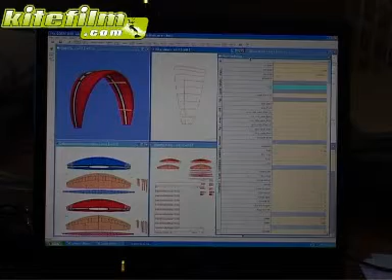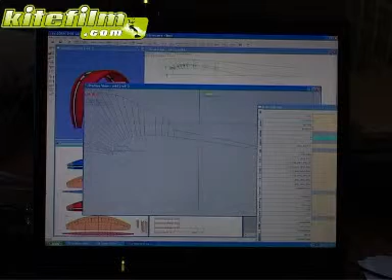From there we start to look at the profiles, and the profiles for sure determine the performance of the kite. And here you can see this is the profile with the bladder and everything overlaid, the final result. So here's the real profile view. And this is showing the curvature of the profile and the high and low pressure over the surface. So I can use this to help me design different profiles.

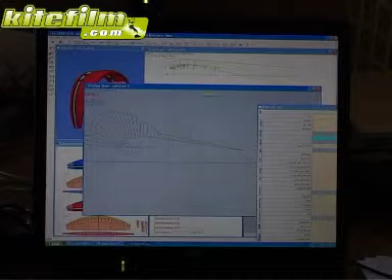Here's the leading edge and the whole profile. Now this here is the profile of the kite. This is the wing shape of the kite. That's it at the center strut. That's the profile being used in the center strut. So if we look at the station flow, we can see here that we have a different profile at different places on the kite. So there's different profiles.

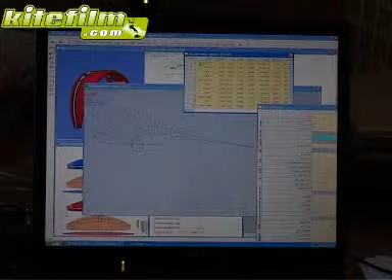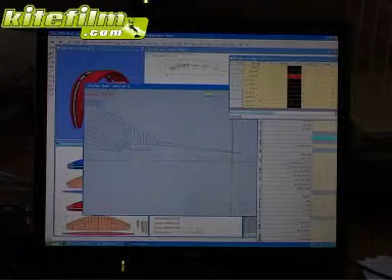And from there, we can look at the station, or the different types of profiles. So for example, here is the profile at the center, and then here's the profile in the middle, and here's the profile at the tip. Okay. These are the different profiles being used. And then if we want to look at all of these profiles at once, we can. Okay. So now we got all three profiles on here, and we can change the colors to view different ways.

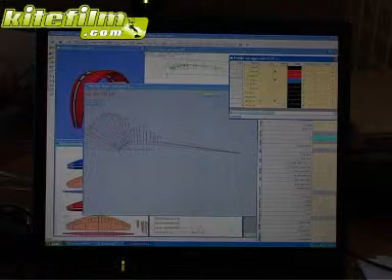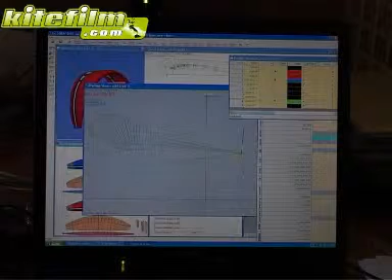The unique thing about this program is the control that we have. We have just an incredible amount of control of how we work within the program. And we also simulate a wind tunnel. So here we're doing a wind tunnel simulation now, computer generated, and here we can analyze our profiles and how they relate to each other, each of the profiles.

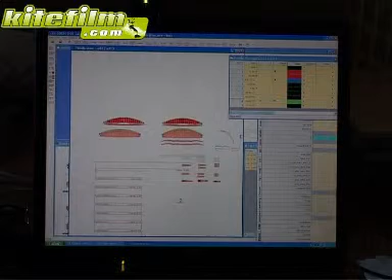Basically I send a file to China and I get it back in 5 days, and I usually send about 5 files every time. Here you can see all the pieces that make up the kite. So if we zoom in, you can see here's the new X4 layout, and here's all the individual panels that make it up. So this is what goes to the factory in China? This goes to the factory. I just email it, and they get the same file, and then it's cut on the plotter, and they build the kite.

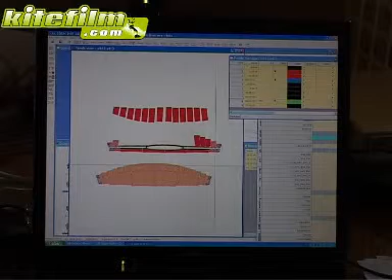We have a huge workforce over there, so for us to build the kite here would take 4 days. Over there it takes 6 hours, complete with printing and everything. So these are the main canopy panels. And then over here we've got the leading edge pieces. And you can see there's a lot of detail that goes into these pieces.

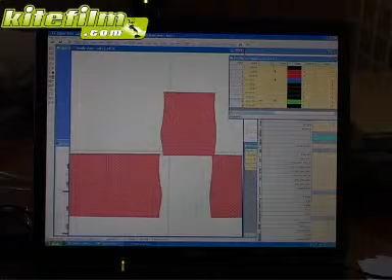Here you've got the lines that align the struts to the leading edge. You've got the canopy sew lines. You've got little marker lines here that show how everything lines up. Everything is automatic within the program. The parameters, I can adjust all parameters very quickly. So for example, aspect ratio, wingspan, profiles, where the webbings go.

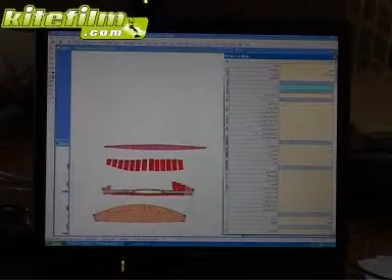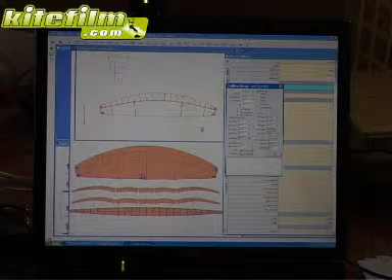You know, here you can see even the detail of where the webbing gets sewn on. And I can change that detail. That's the tow position, right? Yeah, tow point position. So I'll change it to 7. So now you can see the entire kite changed with an aspect ratio of 7.

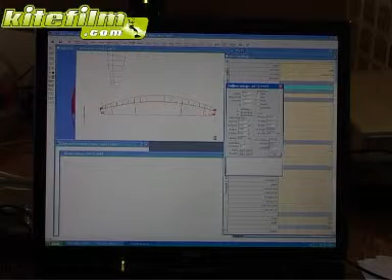So if you put it down to like 3 or so, can you do that? Just so we see the changes? So that was 7, and here's 3. There. Oh, yeah. So you can see the radical change. For me, the way I'm calculating is I'm taking the maximum profile depth related to the span. So that's the real way to do it.

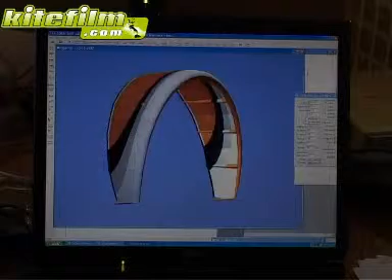That's basically the line that runs from here at the max span camber, runs around. And then that's related to the span and depth and area. So here you can see this has an aspect ratio of 6.75. And here we can change it to just 6.5, and you'll see the difference right away.

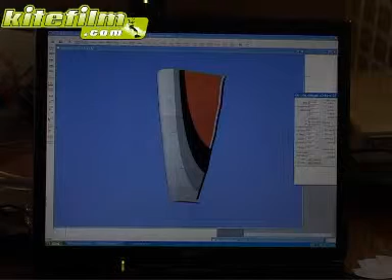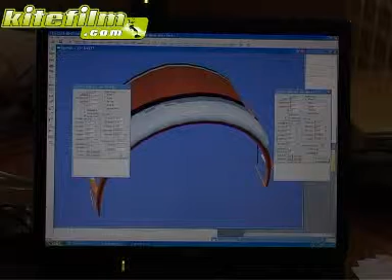What we were talking about of a 5 is actually pretty similar to what we're doing now. We still have a similar aspect ratio from the AR5. That's how we were measuring it at the time. We were measuring it a different way, because now we're measuring the maximum span. Before we were just measuring the width versus the height to give us the aspect ratio. Now we're measuring the maximum span versus the area, which is the maximum span of the foil. So the maximum span of this foil is somewhere right about here.